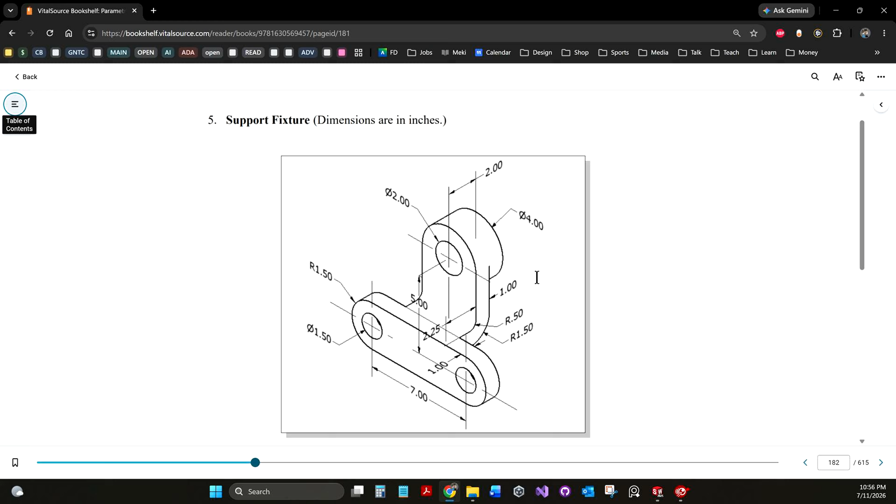You've got your base, which is a very traditional shape, having concentric circles connected by tangents with lines connecting to another object. So we have a cylinder up here, we've got this little base, and we have a connector between it using the L shape. It's not that difficult, but we're going to start with the base, then this base, and then connect it essentially.

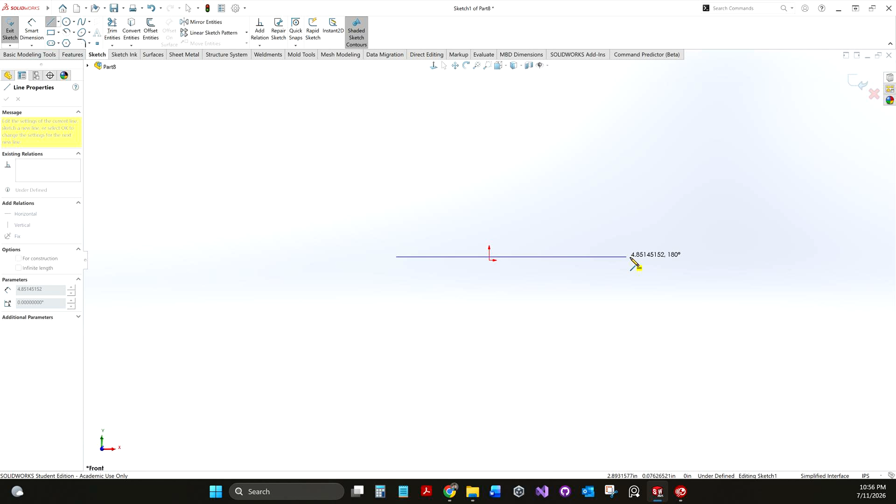And actually, we may just do the connector second, but we'll see. I usually just kind of play it by ear. So we're going to do another imperial part template. We will start the sketch where we are. I'm going to try a different approach this time. We're just going to draw a line straight across for the center line between the two circles, about 7 inches, and we'll see if we enjoy using this as a construction line.

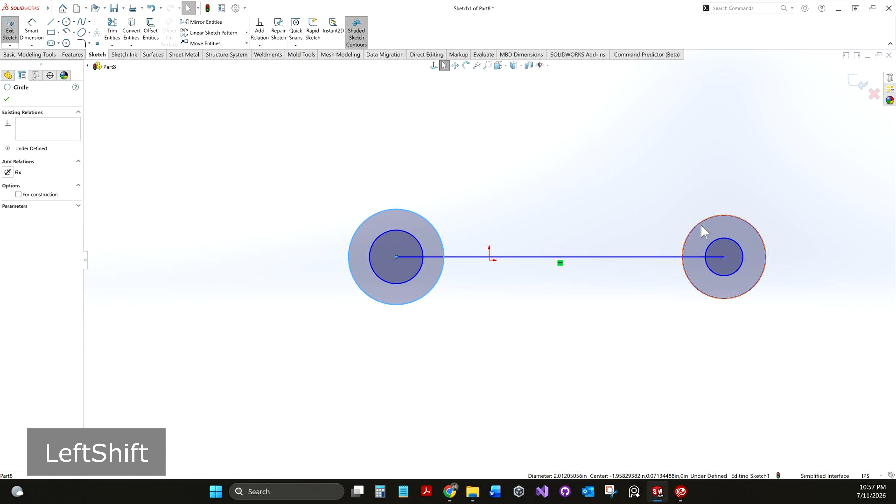Okay, so we can go ahead and go about adding some relationships. These outside circles, we can say well, we know they're the same, so they are equal. We know that the two inside circles are the same, so we can say that they are equal. We can go ahead and do a line over here from quadrant to quadrant. Oh, there I go again, hitting space like it's AutoCAD.

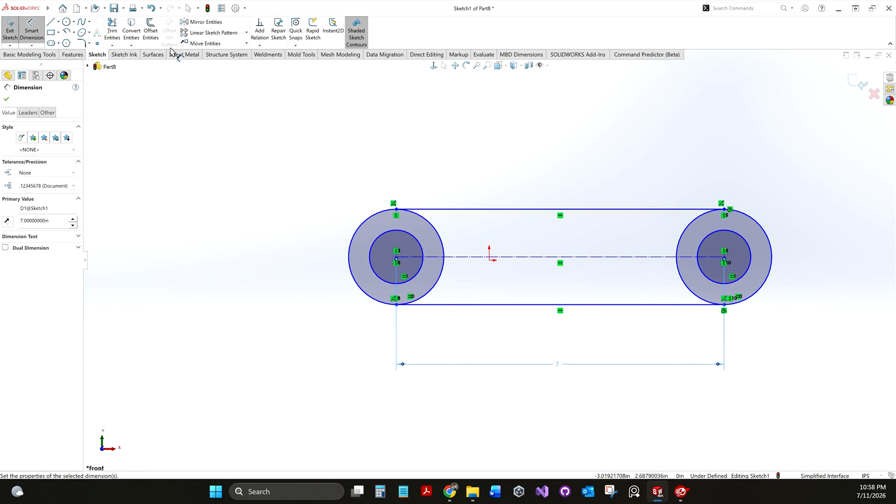And let's see, we can make this guy construction. And heck, while we're at it, let's go ahead and dimension this construction line. We can dimension, actually let's trim the big circles. We can dimension a big circle, it's 1.5 radius. The inside circle is 1.5 diameter.

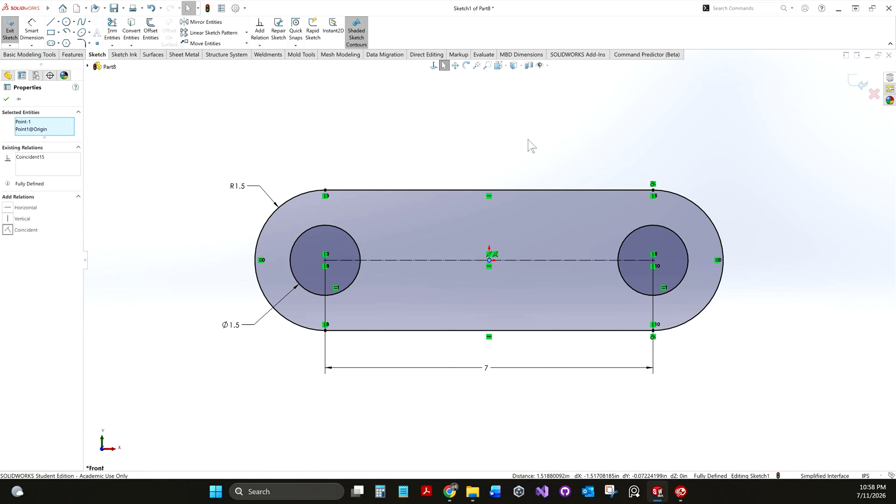And let's see, let's make the midpoint and the origin coincident. And it's fully defined, cool. So we can exit, extrude that a depth of 1.

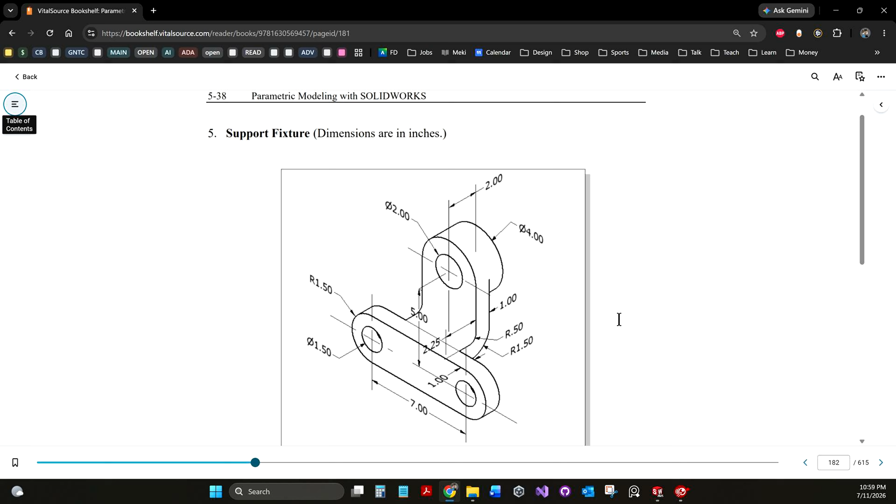Go now. Okay, so from here, let's see, we can look a little closer. And it's funny because this part, this one always has a little bit of finagling to it, but if you look closely, we can see the back boundary here. It moves along the bend and it shows this little projection line extending further, indicating to us that this part is not tied to the center line here as it used to be.

Back in the day, it used to be that it went lower, but now it rides to the top. And so if you look closely, this back face merges with this face. So keep that in mind.

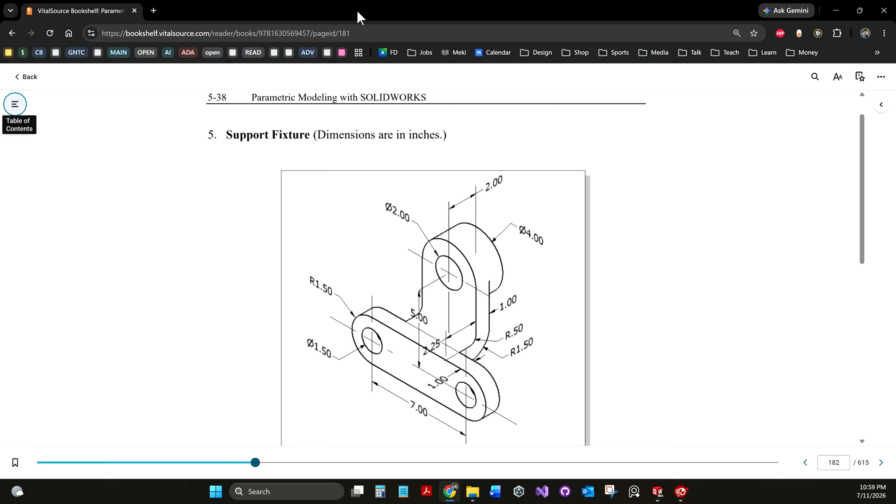So what we're going to do is draw the side view profile of it. And to do so, we're going to need a plane. Let's see which plane it is. It's the right plane. And we're going to convert that edge and the top. Well, we don't want the face.

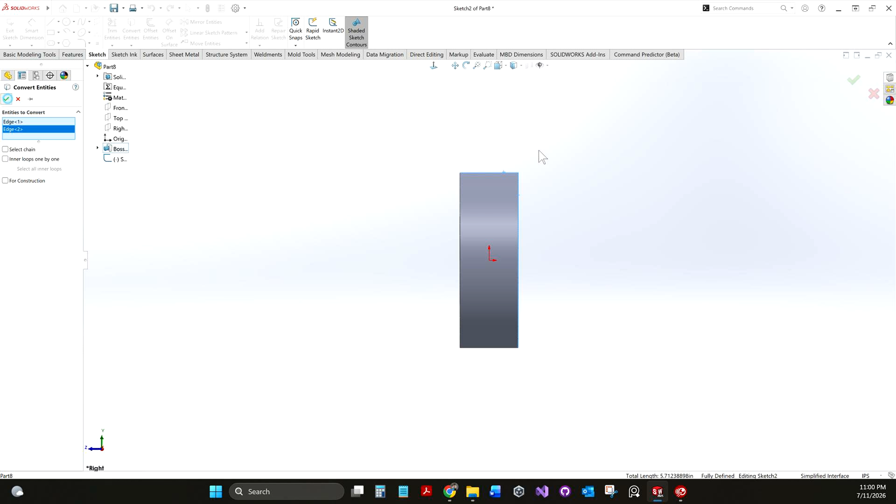We're going to convert this little edge here and the top edge and use those. And we'll add the rounds in later. We're just going to draw the perpendicular lines for now. Like, you get the gist, rough sketch. Trim. And let's size it up a little bit. So we've got, let's see...

From here to here is 2.25. Now this is again a nuance point, but this top line here, you could represent it however you want. But for me, if I'm pulling the book back over for a minute, I'm going to draw the 5 dimension now. And so I'm going to do from the center mark here to the center here, and that's going to be the top of my rectangle.

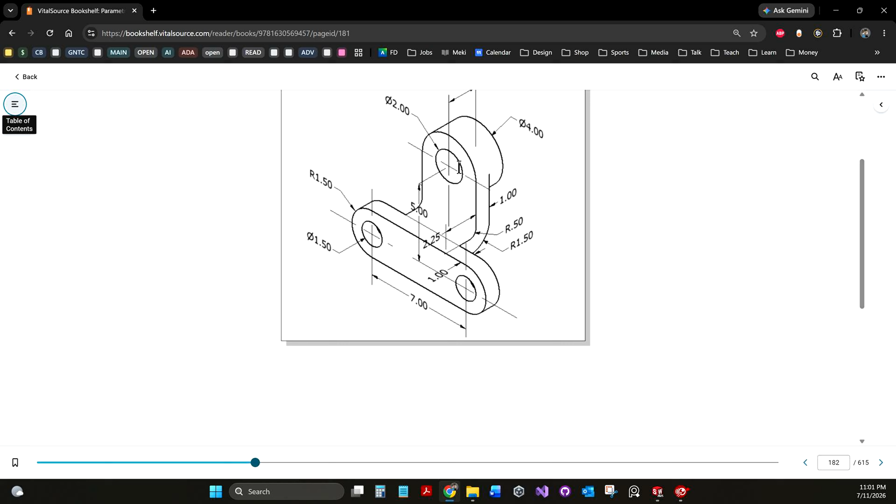And then as always, I will add the round part in with a later feature. So from here, and I'm going to use the origin because conveniently we know that we located it in the center of that base earlier. So now we've got a location there, and we know that the depth of this part here is 1. Likewise, it's the same over here. Oh, bad clicking on my part.

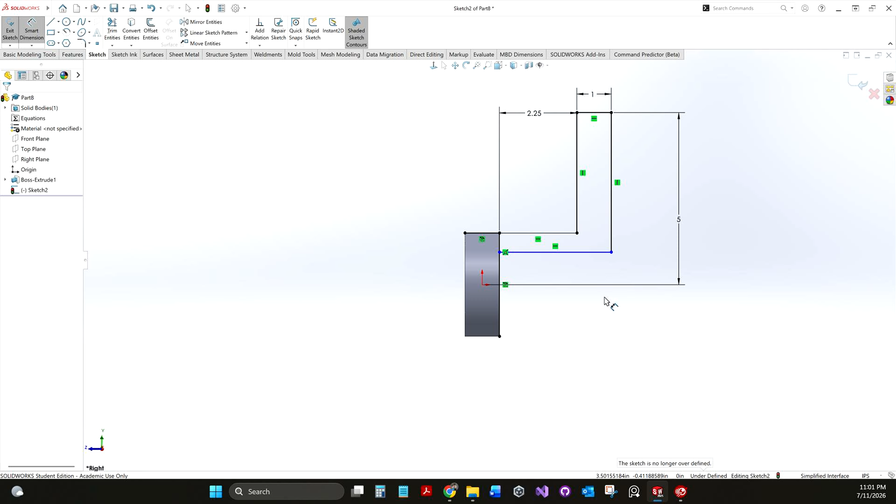All right, so now we just need fillets. There's a little trick for this. The outside fillet, the book shows these so you don't have to do the math, but I think it's important to know. So the outside fillet is 1.5.

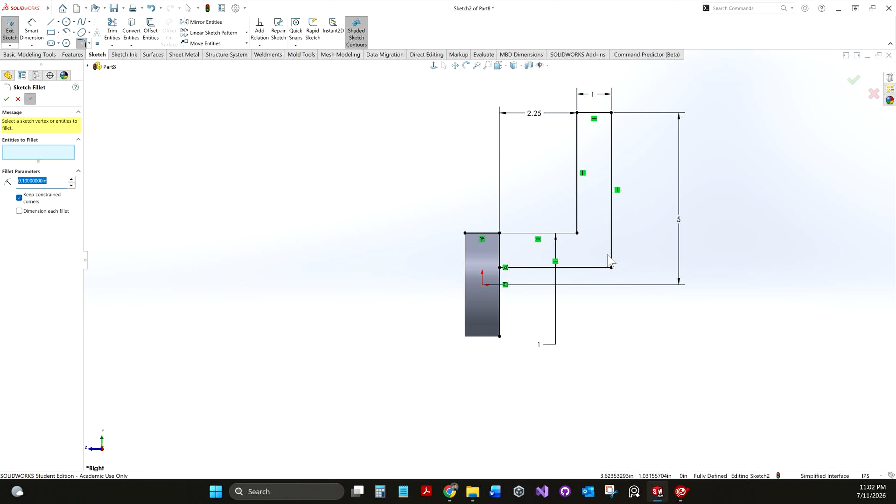Now, if you weren't given the other fillet, how could you determine it? You could say the inside bend equals the outside bend minus the thickness. It's worth writing down. Additionally, if you have the inside bend and want the outside bend, it equals the inside bend plus the thickness. If you want the inside bend, it's the outside minus the thickness.

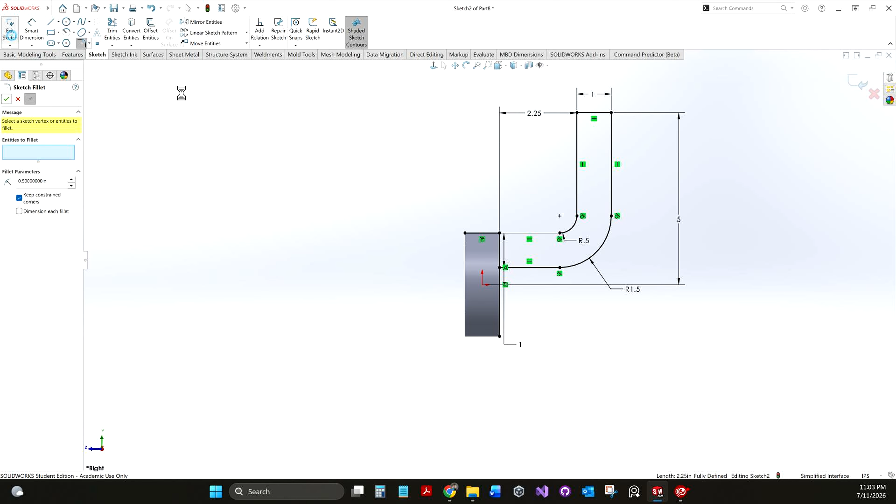So we can take this R1.5, subtract 1 from it, and that tells us this inside fillet here should be 0.5. Again, it's shown in the book, you don't have to know that, but it's pretty crucial info when you get into sheet metal, so take note. I think it's pretty important. If I had a quiz, that would be my super important quiz question, but I don't.

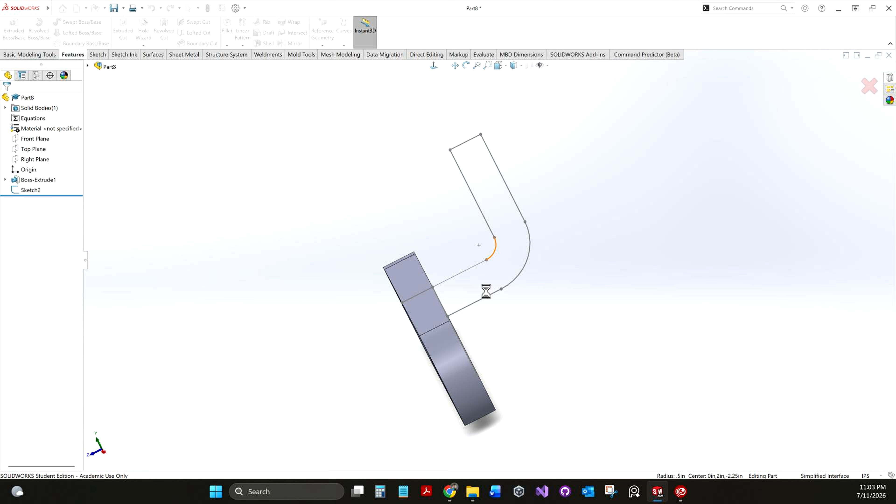All right, we're looking at a width of 4, and it looks like it does not like my profile being open, as usual, because it's giving me a thin feature suggestion. This is something I'm really struggling with, because Inventor wouldn't care that you don't have a line there, it'd be like, oh cool, you projected a line. But it really cares, it cares a lot.

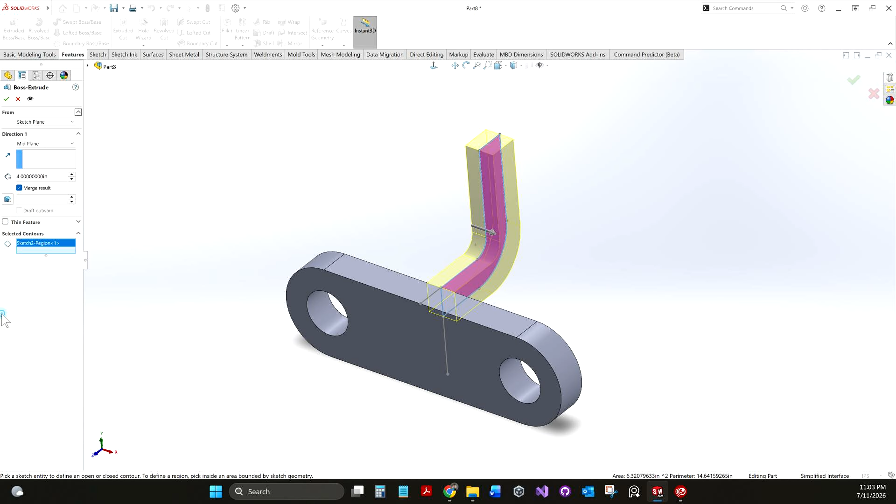So we'll just try it. There we go. Okay, thank you, Lord. 4 for the depth, and we derived that from the circle itself being 4.

Cool, so a lot further than you probably would have thought we'd be at this point, because it looks crazy, but it's really not.

And then we're going to draw on this back face here a circle, after we convert the top edge, and the circle's going to be drawn with the center at the midpoint and the end at the end of the line.

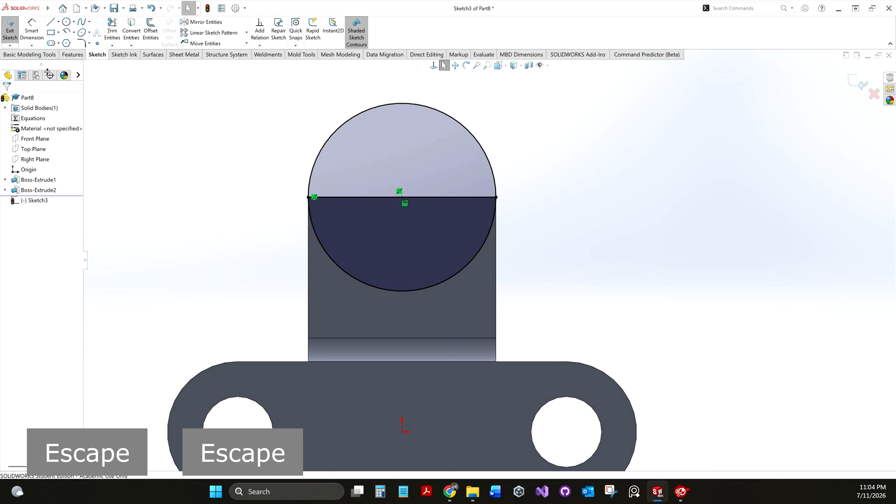It's fully defined already. We're going to trim it. Well, actually, no, we're not going to trim it. We are going to—well, actually I closed it, but let's go back and edit it. And we're going to draw in the hole as well. We're going to use the sketch for 2 features, one that's additive and one that's reductive.

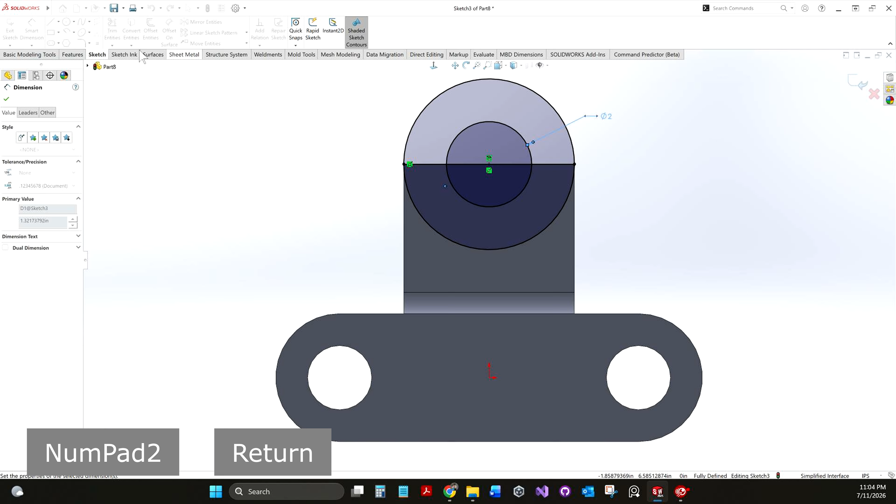This hole is 2. So let's go ahead and first extrude outward, and then we'll cut the inside out.

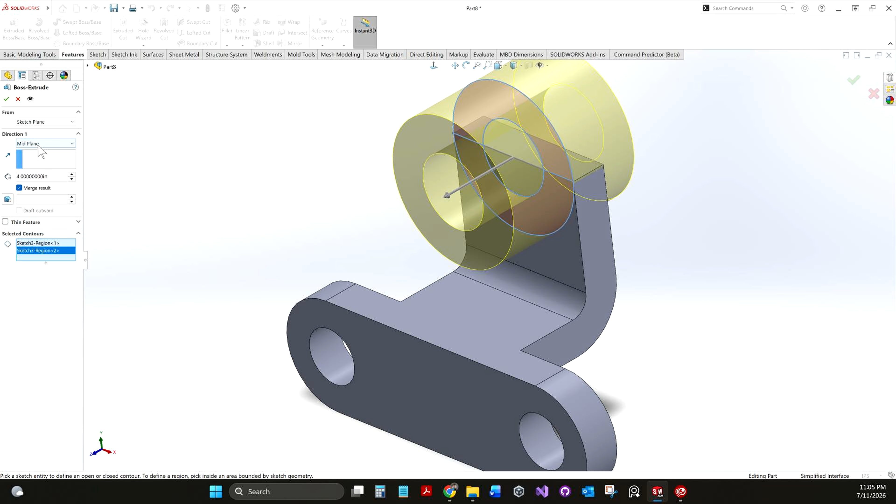Okay, so we know that it's 2 in depth, and we want to go one way, so we're going to go blind, we're going to flip it. Go now—oh, I clicked something without seeing what it was. There we go. All right, we're going to turn the sketch visibility back on. I hit the wrong button.

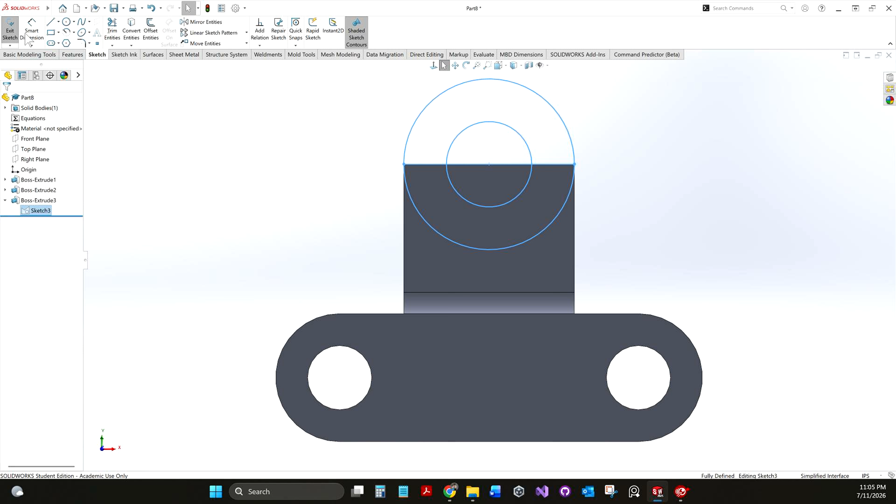And we'll do a cut. Cool, okay, let's hide that sketch. And yeah, that's too long. It was at this moment that he realized that he made a mistake.

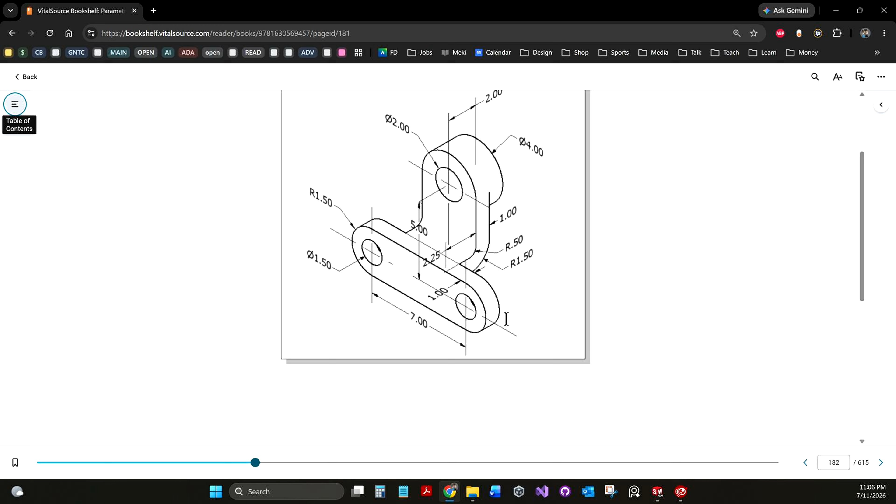So that 2.25 dimension from earlier, I dimensioned it from the wrong place. I'm just going to point it out so you don't make the same mistake if you ever do this again, because you followed me, you already made it. So you have this line here, I dimensioned to this line, but it goes to this back face, so mine is, in other words, 1 inch too wide.

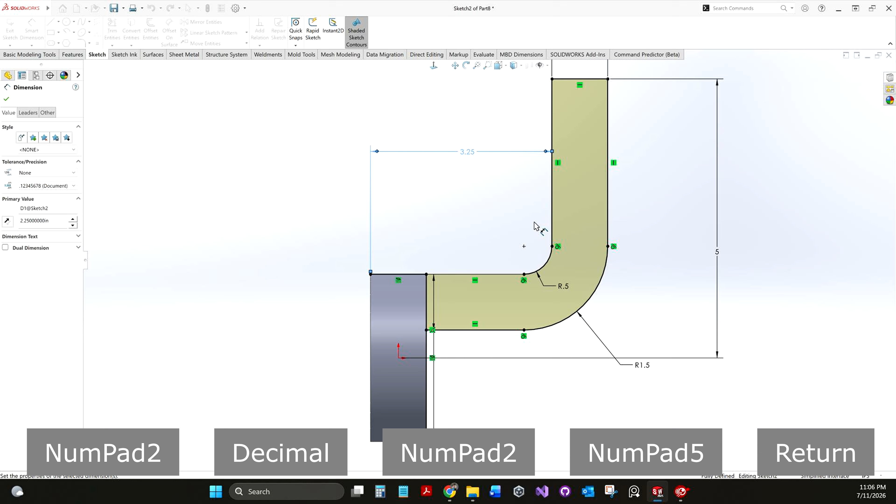So if we go back and edit the sketch, we need to delete this and instead dimension to here. It's funny because in my Inventor series, I'm pretty sure I did the exact same thing. Funny how that happens. Okay, there we go.

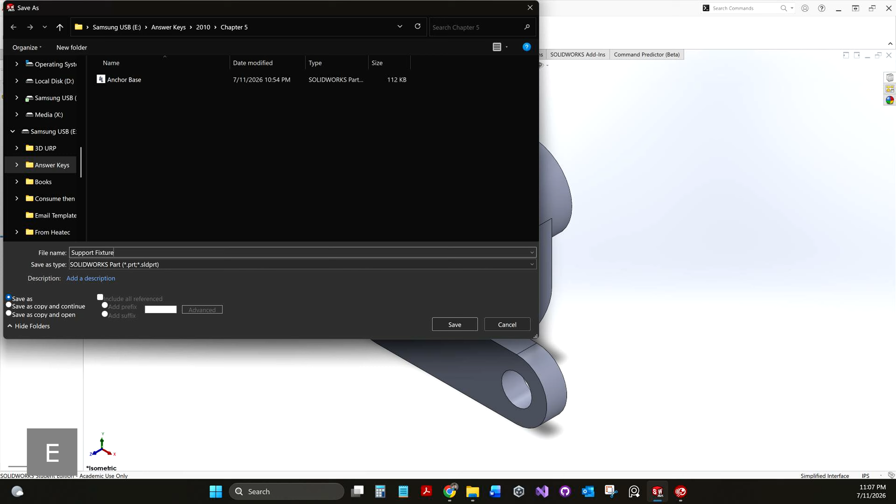Boom, now that is our guy right there. Were there some hiccups? Sure. But, you know, better than doing it on your own. So this will be the support fixture. Save. All right, that's it for this one.